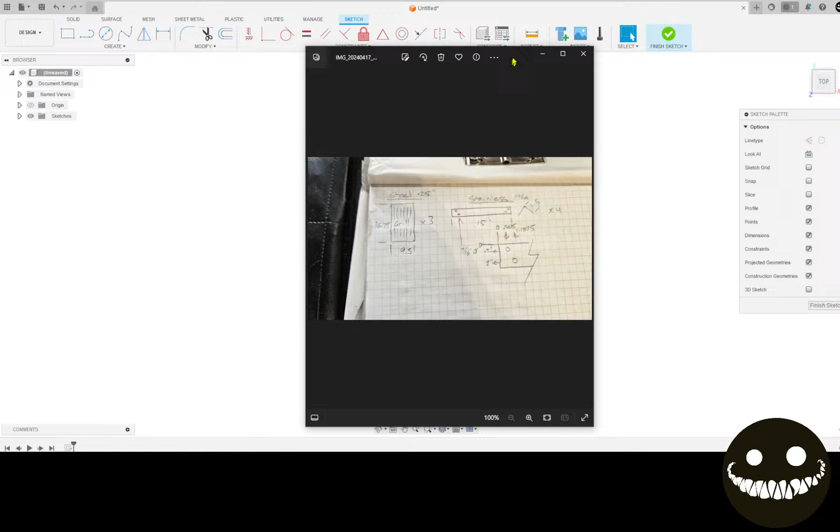Okay, here's some of the notes. It's another picture, and there's another picture. So we are going to rebuild these two components.

We're going to rebuild this piece of angle that has several holes in it, and we're going to make that out of 14 gauge stainless. And this is the barbecue, and we're going to remake these stamped grills out of 1/4-inch plate instead of stamped. We'll do a pretty generic hole pattern to start, just to go through the whole thing, and then maybe come back and try to make some more exotic grill shapes.

And then I have notes here, a little bit of dimensions. These are 9.5 by 16 3/4, and there's 3 of them. And then these are 1.5 inches by 15 inches. And then I have the hole spacing here for that, and it's a x4 on that.

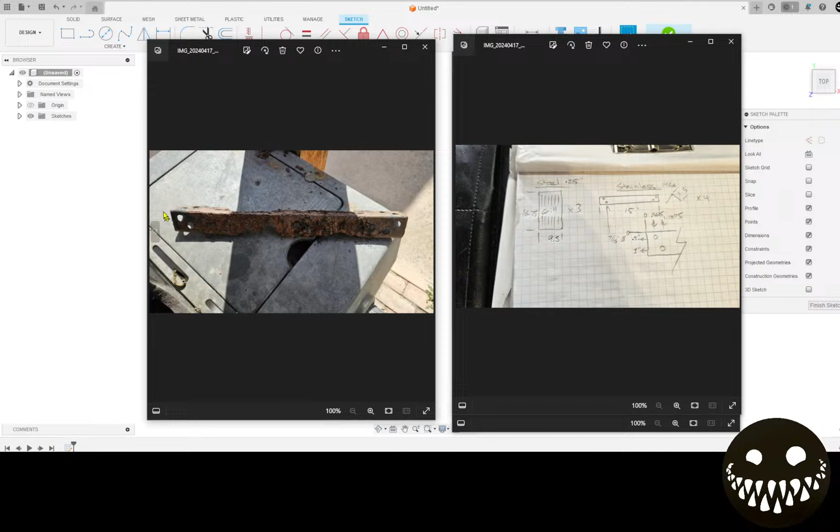All right, so let's start with just these stainless angle pieces. I'm going to move these to the side, and this will go relatively quick, but we'll use the sheet metal function to make these. Alright, move these to the side to my other monitor, and we'll get going.

So I've already started a sketch here. I'm just going to back up on this. I'm going to start a sketch. I'm going to start this sketch in the, doesn't really matter if we're going to start it in the XY plane, just for habit. I'm going to start by making a 2-inch, see, I could do this right on the origin too with the center point rectangle. I'm going to go 1.5 by 15 inch. I'm going to finish this sketch.

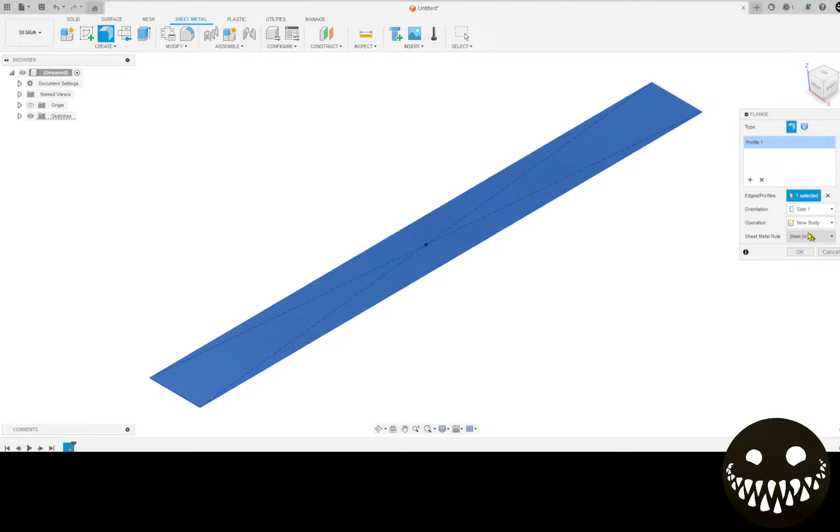And then from here I'm going to move into the sheet metal environment and pick flange, and this is going to be my flange. Alright, and sheet metal rule steel inches, we'll verify what that is after. Okay, the default kind of gives me what I want on that anyways.

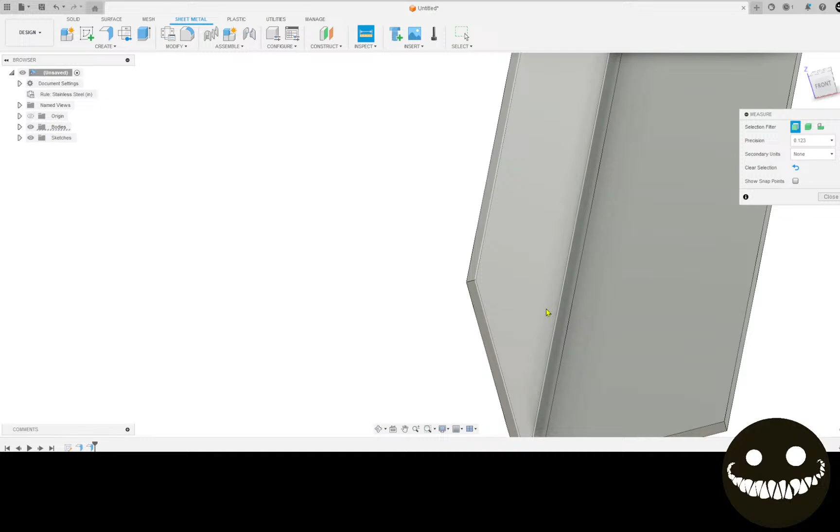I'm going to pull another flange off the edge, 1.5 inches tall. And okay, I'm just going to verify the flange height. And sure enough, it is 1.5 inches. And then we'll verify the flange height the other way, 1.5 inches. Great.

So now let's get into putting these holes in. So I'm going to see if we can start a pattern on this face right here. And I'm going to flip it over. So on the end here, I'm going to do these holes. I have center line dimensions measured off of here, so I will use those. So I'm going to project this line, and I'm going to offset it. I'm going to use the construction line.

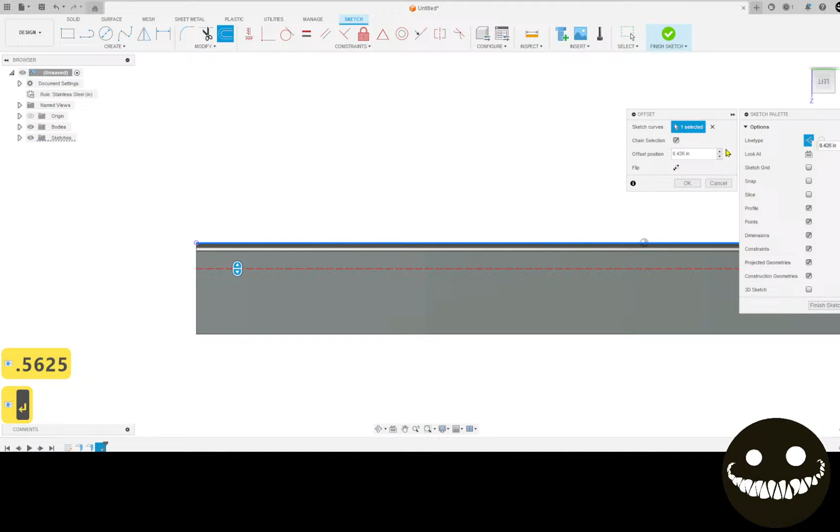Oh yeah, I'm having a hard time reading what that even says on this - my drawing, not my drawing, the drawing I was given. Okay, that's 0.5625. No? Let's do it again here. 0.5625.

Then we'll do another offset command here, and that one will be 1.875. And then again, we'll do the repeat offset command, and it'll be just off this line, and that'll be 0.5, flip. Okay, and one more time. I think that says 1 inch. I'm sure it says 1 inch.

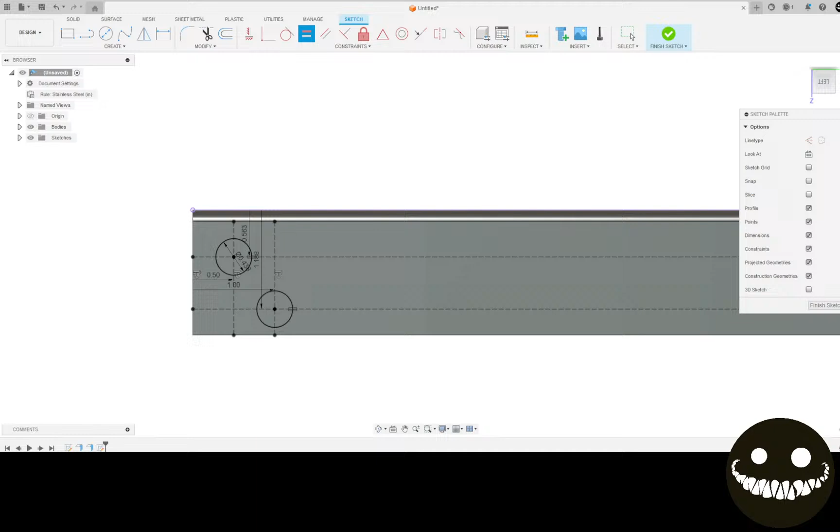Okay, the intersection of these points are our 7/16 holes. Take it off construction line. I'm going to use an equals constraint to make those the same. It sure seems close to the edge. Let me just take a look on the picture. 7/16. I guess it is that big. You take a look at the picture on here. I'll zoom it way in so you can actually see what we're looking at.

I guess it is kind of close to the edge the way those holes are. I will assume that it is drawn correctly.

Okay, and what I'm going to do is extrude those.

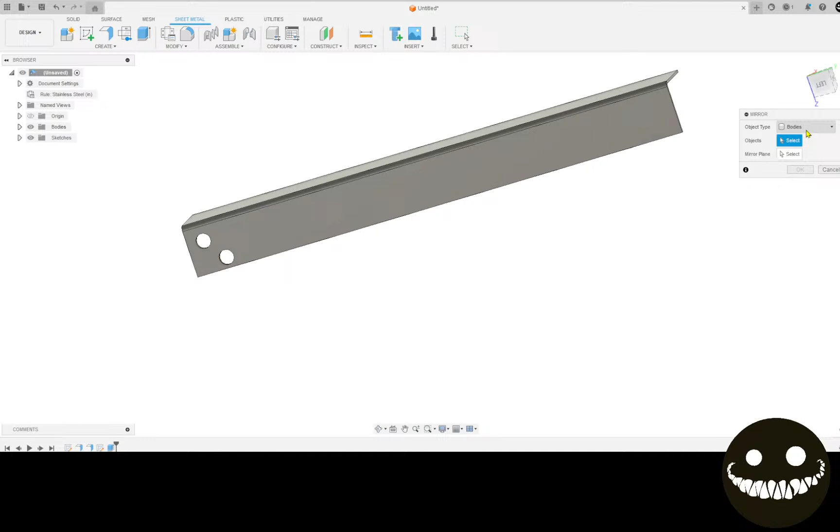And then I'm going to do this. I'm going to go mirror, and instead of bodies, I'm going to go feature. I'm going to mirror that last hole cutting feature. The mirror plane will be this. Okay, now let's cut those holes on that side.

Almost have to like flip and mirror to do it again. I think what I'm going to do is go back to edit sketch, copy, finish sketch, start. Oh nope, I'm going to start a new sketch on this face, paste.

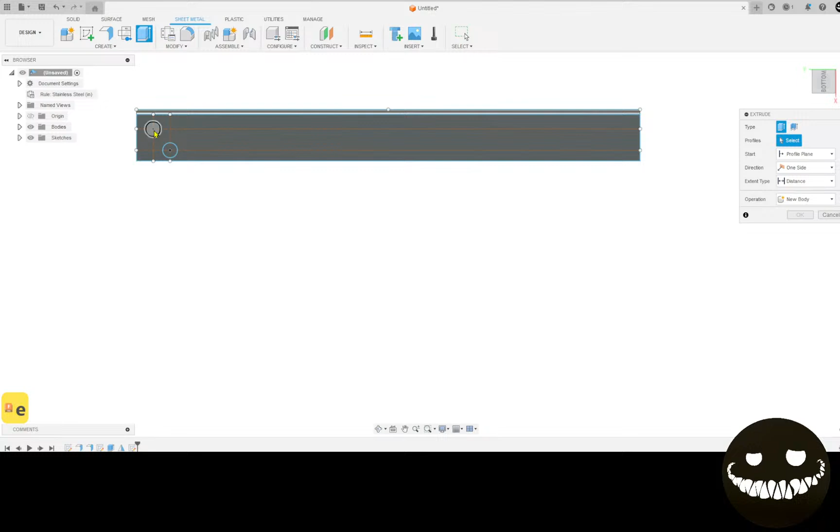Perfect. And then we'll just extrude again. Alright, and we will mirror that feature.

It's the nice thing about centering stuff on the origin is you get this mirroring ability.

Now, just take a look at that picture again, just to see if there's a radius there. I think there might be.

I am going to just ease those corners.

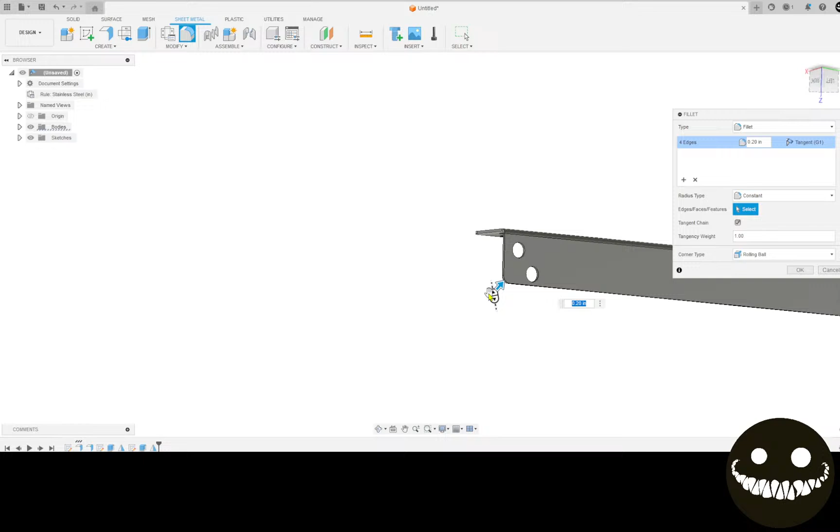Let's make a flat pattern. Alright, now we have this nice flat pattern.

So what I'm going to do next is I am going to save this file, which I should have done right off the bat. And I'm going to call this BBQ replacement angle.

And now I'm going to go derive this flat pattern. Okay, excuse me. Now I've derived this into this other project page or tab, and so I've got one of these components now.

I'm gonna go like this, and let's pattern the components. Get 3 of these, or 4, I mean, because I need 4.

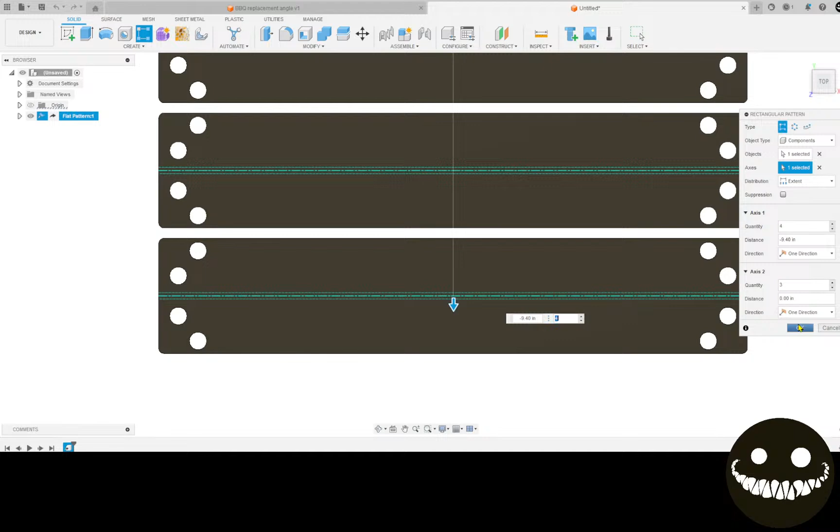Okay, let's move to the next stage, which is manufacturing.

I'm going to create a setup, bottom left hand corner. I have a default of a 1/4 inch of stock around the outside just to give me a little meat when I'm cutting out, when I zero to that corner.

And we're going to call this BBQ replacement times 4, SS angle.

Alright, let's go into cutting. Select our tool. I'm going to do slow speed fine cut 14 gauge, but that's going to be not stainless.

Well, for the sake of it, let's go through making a tool. We're going to go and up here to the plus sign when we're in our library, and we're going to create a new tool. And it's going to be a plasma cutting tool.

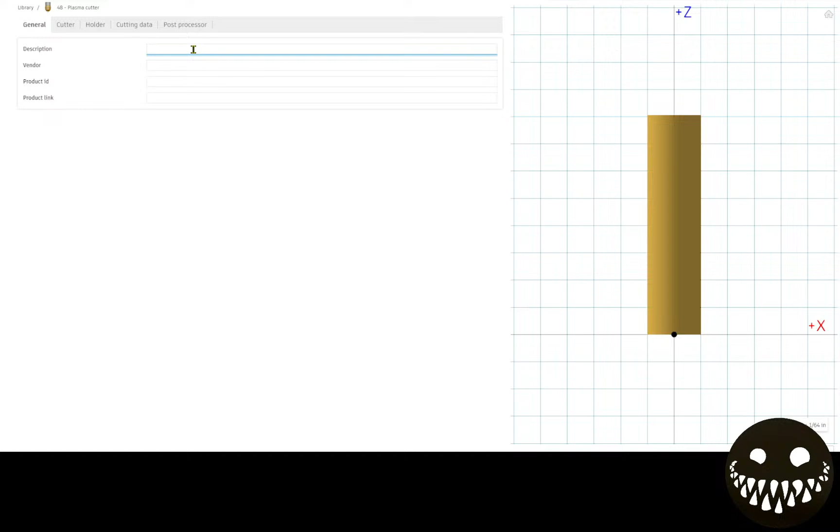And description is going to be stainless, 14 gauge, fine cut low speed.

Vendor, I'll put Hypertherm. Don't really need this information.

Now, I am going to quickly pull up the cut charts for my cutter. I'm using the Powermax 65 or Powermax 85. There we go, Powermax65/85 manual. Let's bring that up.

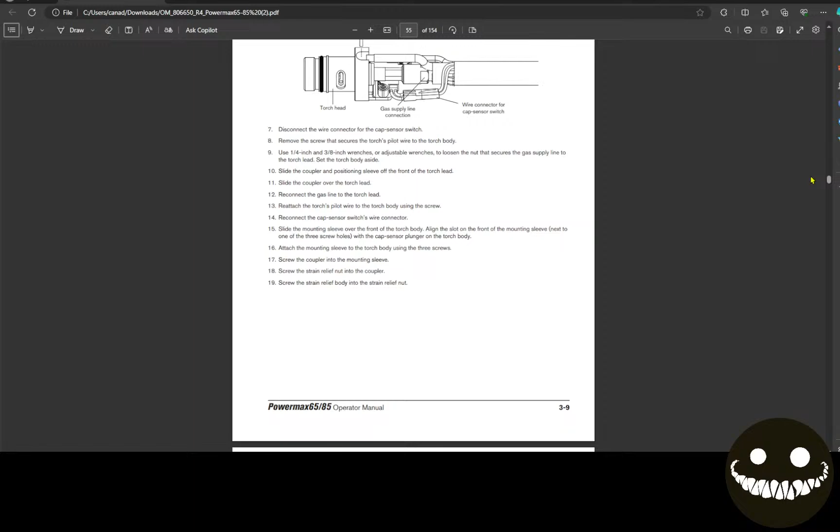Find. I should have just searched it at the beginning. Here we go, using the cut charts.

So fine cut, 45 amp, 351. It's too bad it doesn't actually give a page number, but I can click it.

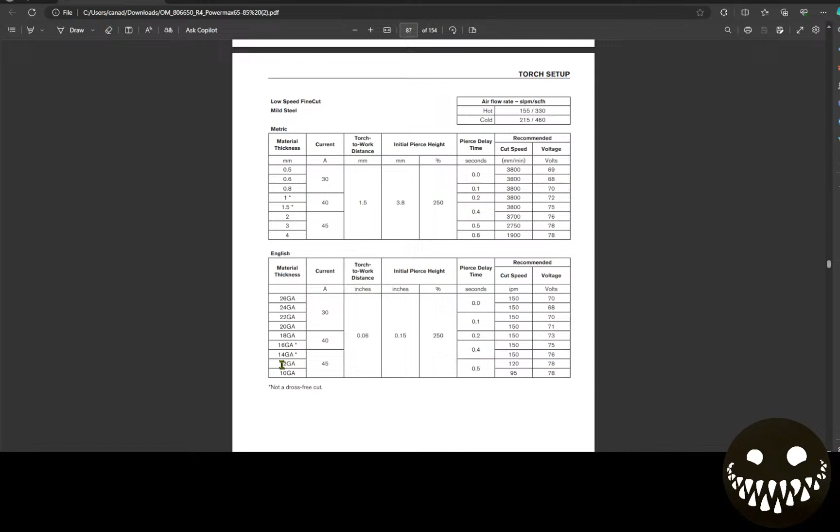14 gauge, and you notice here it says not a dross-free cut with the asterisk. Here, let me zoom right in. See, asterisk, not a dross-free cut, but I always find it has really good dimensional edges.

Oh, and we're going stainless steel. Here it is, which doesn't have the dross-free cut thing on there anymore because it's actually pretty clean. I forgot we were doing stainless there for a second.

So you notice we're at 40 amps here, and 110 inches per minute, and the voltage is 69, and we're gonna have to go up a bit to find the kerf width on another chart, but let's fill in some of this information first.

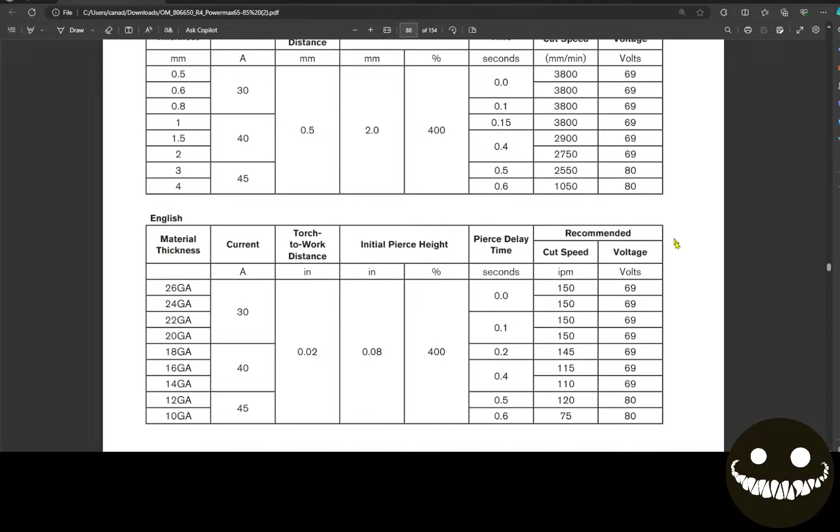Actually, no, let's go find that kerf width first. That's page 88. Kerf width is up before all these charts start. Right here. Right there.

Stainless steel, fine cut, 14 gauge, 0.04. All right.

Gonna go into nozzle diameter. Nozzle diameter is actually talking about this here, but Fusion will cut to this width if you put an inch in, and it wrecks the simulation, so I always use the kerf width for the nozzle diameter.

And then the simulation will look proper. It used to work, and then they made some adjustment. It doesn't work. And I think we said 110 inches.

I'm going to write that in here, and we'll go back and look. Cut height will be 0.0, or no, 0.02. Stainless is a little lower. Let's just recheck.

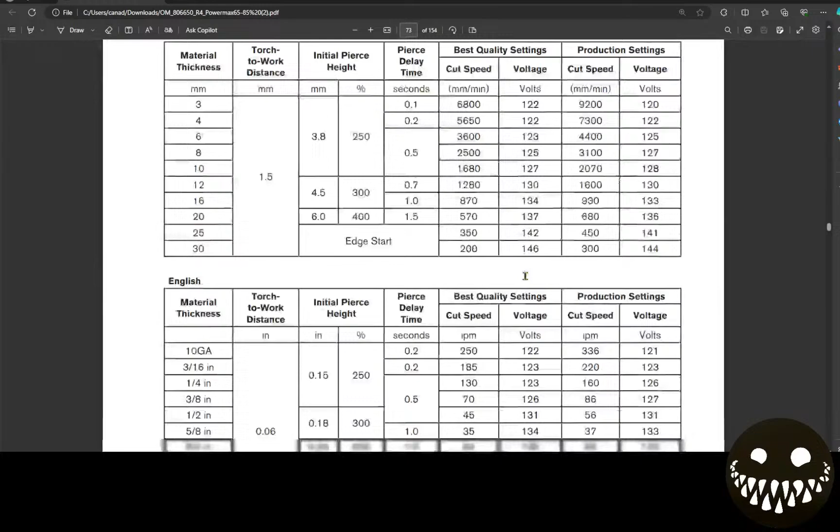So yeah, 0.04 for the kerf width, and then if we go down to page 88.

We find that our torch to work distance is 0.02. It's a third of what the normal cut height is.

And then you see the initial pierce is 0.08, which is about half the normal pierce height. But in this case, it represents a 400% increase from cut height to initial pierce height, whereas in the other charts, it's only a 250% increase from 0.06 to 0.15, excuse me.

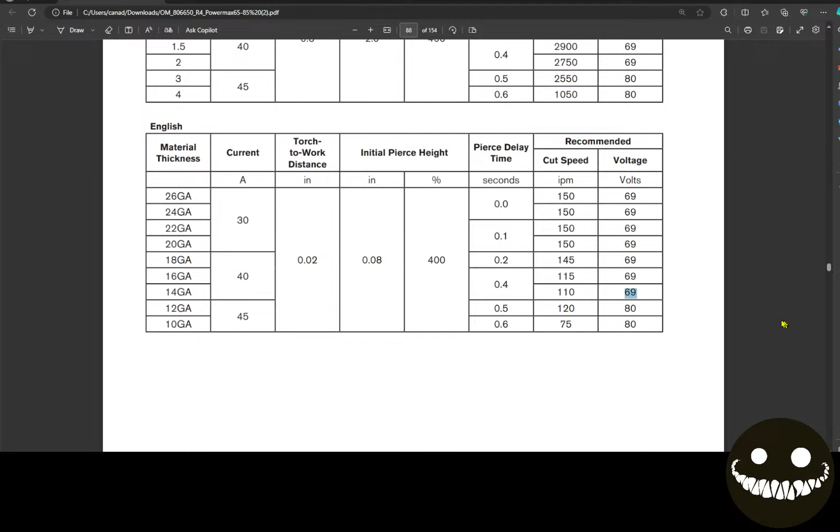Okay, anyhow, yeah, it was 110 here. So let's get that, and we'll just remember this. We could actually put that in there in our notes if we wanted, but 69 for voltage.

All right, that's it, we'll accept that. And we want all these face contours selected.

I don't think I'm going to do any feed rate or anything like that. I could put some notches in though, maybe I should do that. But let's go through here and then we'll go back and make some changes, and I'll show you how some of the parametric connections really are awesome for Fusion 360.

We'll do a lead in. I think I'm going to just make all the lead ins for that 7/16 hole. So 7/16 divided by 4 if I wanted, something like that, for my lead-in radius. No, that's way too small.

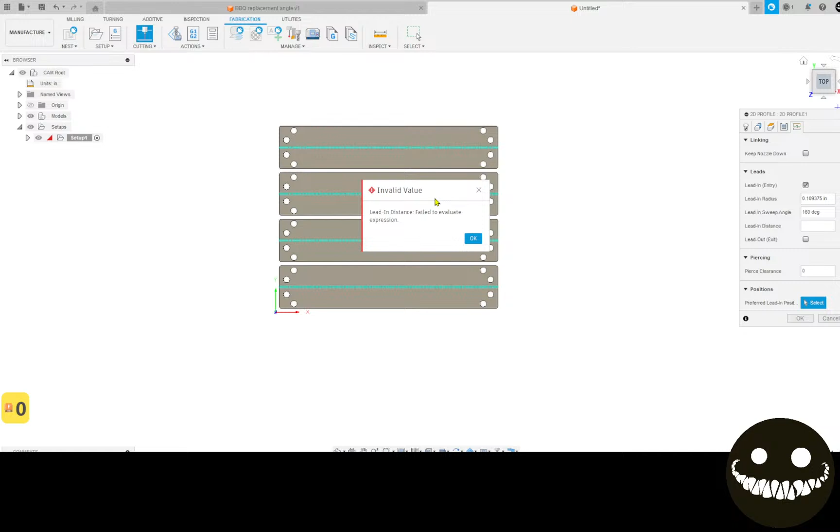You just write a small number in here, like 1/8 inch or something like that. Alright. Oh, I forgot to have a number here in the lead-in distance, 0. Alright.

Okay, I like that so far. Actually, I'm going to have to watch some of these, they're going to cut right off the sheet on the end. So what I'll go do is go back into edit, and I can prefer lead-in positions, and I'll just add a couple of those. And it'll put them all there.

Perfect. So now I look at this and I go, oh, maybe I should have put some bend reliefs in it, even though with my equipment I can bend this no problem in one go. It might be nice to have some centering equipment or some bending lines in here, but I've already done all this work to this point, right?

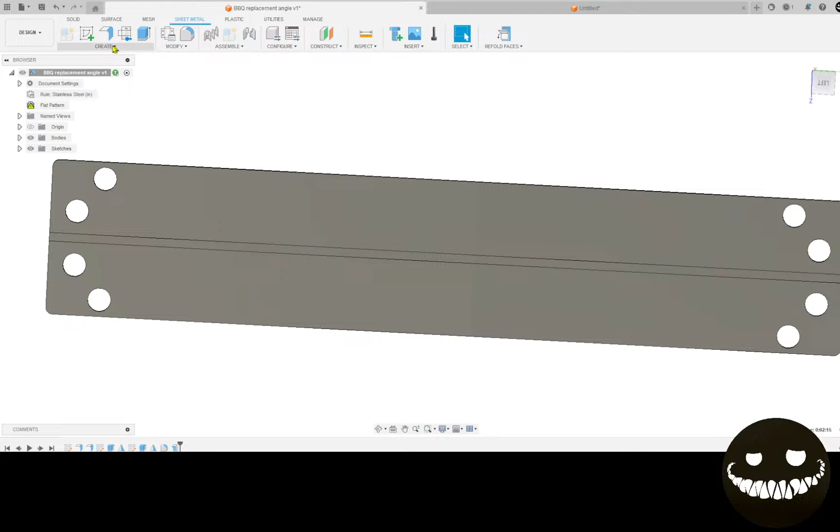But the beauty is I can go back to this angle and we can start working on this again, and I'll unfold this piece. And now I can work on this component. I'm going to do a few cutouts on it.

We have a little notch there. Maybe even a little less. I just want a little notch to let me know where to start. I'm going to finish this sketch.

Now I'm going to extrude this little piece I just created. Alright. Nice little notch. Let me line things up.

I don't think I'm going to round those. But what I want is the notch on both sides. So again, I will mirror that, and I'm going to mirror the feature. It'll be that last extrude, and my mirror plane, I will use the center line again. Alright, and let's refold those faces.

Nice, we have a nice little notch to show us where we're at. Now I'm going to save this.

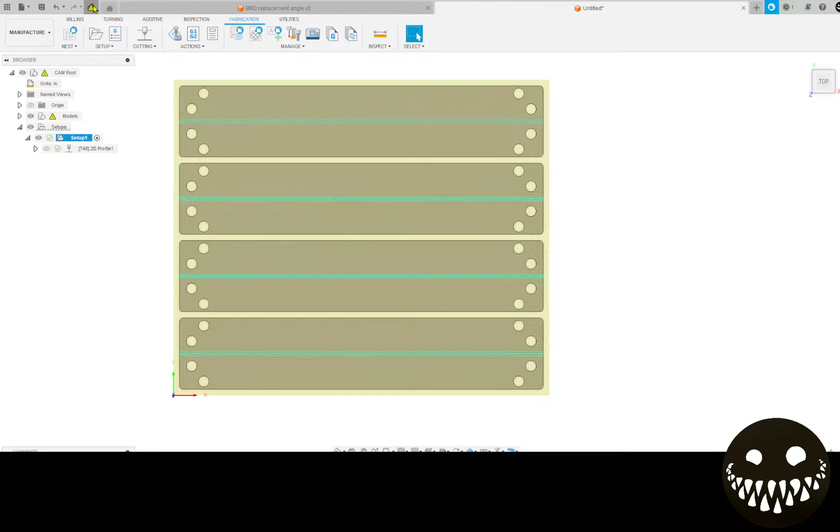Yep, update selected. And now you see we have little notches on every single one. Close, I can just regenerate this file quickly. And it's already updated it with all those notches. So it makes it really quick and easy.

I'm going to just export this. This is ready to cut. It already has the name right here. I can put a comment in here too, and I'm going to put in voltage 69, fine cut low speed.

And this will show up, I'll be able to see that in FireControl. And we'll adjust the pierce height to 0.08. Pierce delay to 0.1. I have an XR, it has less latency than the Pro. Cut height 0.02. Spring back, I'm going to get rid of it entirely. There we go. Let's post that.

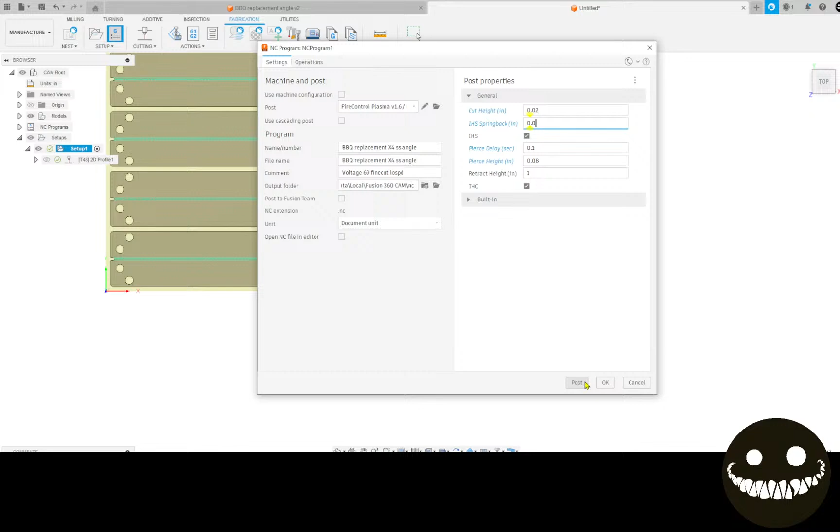So that code's done. We're going to save this file as BBQ replacement angle derived times 4, times 4. Save.

Okay, we're done those components now. Let's move on to the next ones. So our next ones we're going to work on is the actual grill. And here's the actual grill, these 3 components we're going to make. So let's start those. I'm going to start a sketch on the XY plane.

Let's take a look at our measurements here. For the grill, 1/4 inch steel, 16.75 long, 9.5 wide, and we're making 3 of these.

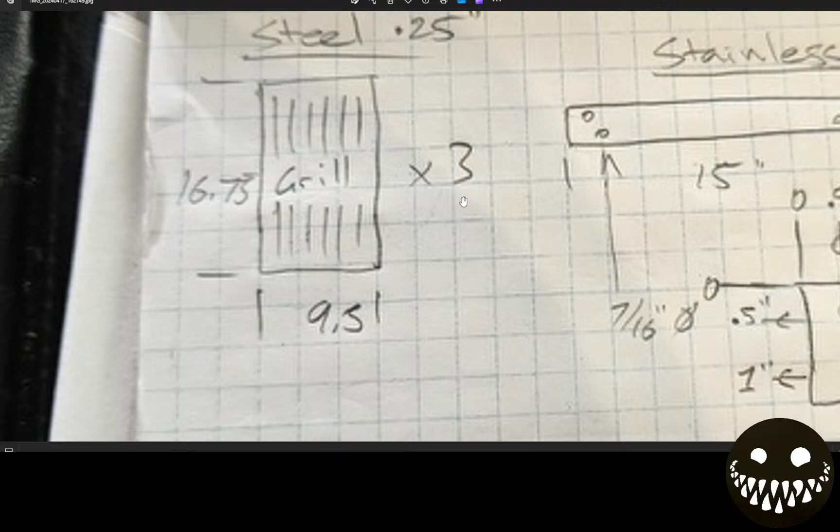These original grill pieces basically had slots separated by a few rails on the end. Interesting - they basically stamped it like you would just lay out some pieces of bar and weld it, 3 pieces one way and a bunch of ribs the other. We're gonna start making something close to this and then maybe do something a little more exotic after.

Okay, we'll start with the rectangle. We're going to use the center rectangle from our sketch palette, centered on the origin plane. It's right here - I can only see this part of origin, but if you make it visible you'll see the whole part. Let's go in there and make it 9.5 by 16.75.

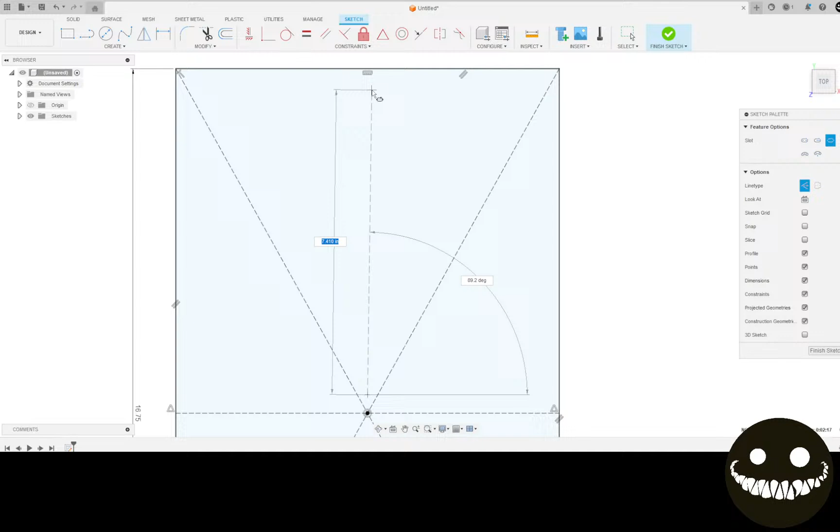Now how am I going to do these slots? Just going to do something basic to start with - a slot. I'm not going to do anything complicated for this one, just a really basic slot pattern, and then we'll go wild in a minute or two.

What do we want, about 1/2 inch width? Is that too wide? No, that's probably about right. I don't have the slots to measure, so. And now let's pattern this.

Let's get a few more ribs in there. I want a little bit more. Let's call that good right there.

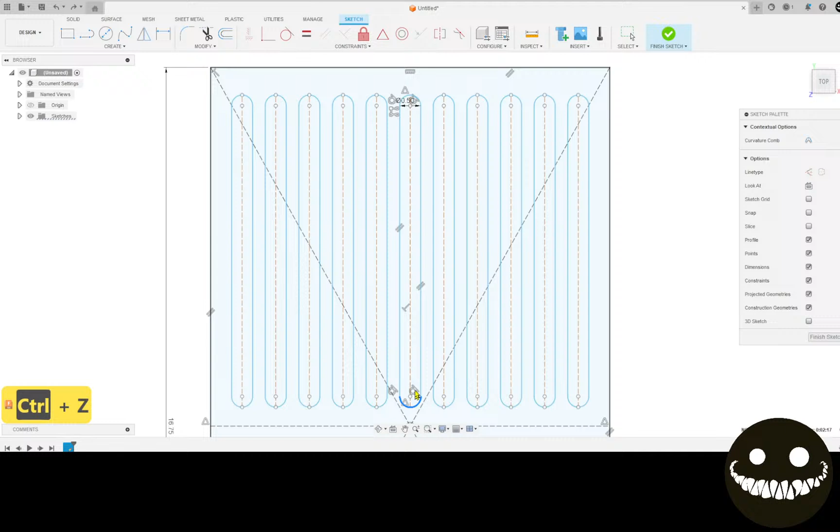I'm gonna go a little less wide. Let's see if I can go 7/16. Will they all change? They should - yes, they do. Good. What else I'm gonna do is grab all these and mirror them.

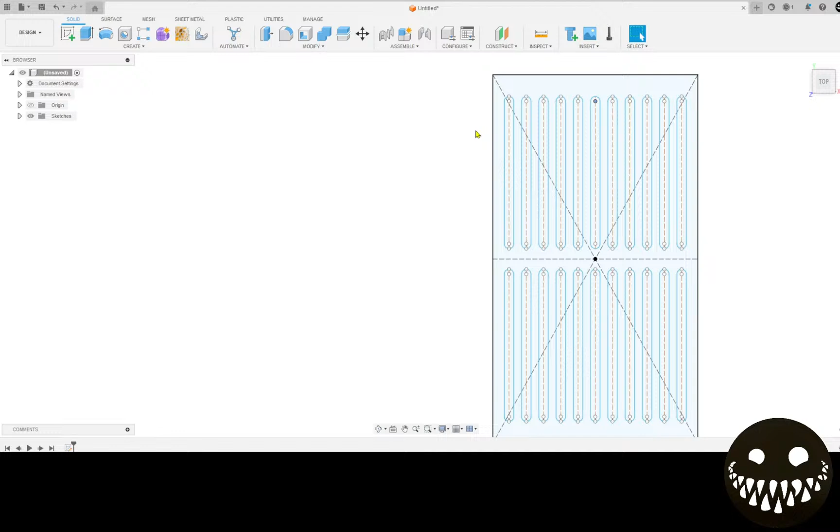Sorry, I'm just thinking about how I want to pattern this. It doesn't matter - let's just move this. I just didn't want too many objects. This isn't the way to do this, but it's the way I'm going to do it right now.

Oh, it won't let me create copies, eh? It should let me create copy. Interesting. Probably a feature in there it doesn't want me to copy, like the patterning or something. You know what? Let's try.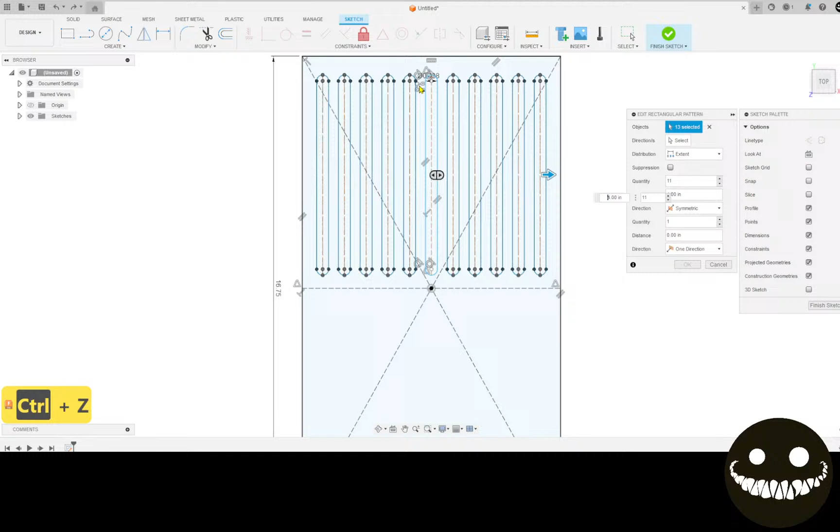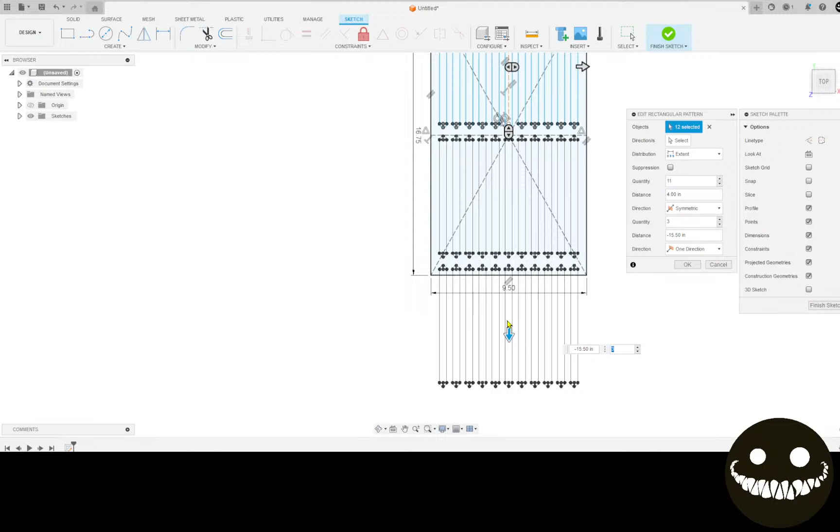Let's try this - in two directions? That's too bad. There, that's what we want. Perfect. Kind of perfect.

Let's go back one. That's kind of what I want. Let's hit OK, and then I'm going to move this so we get a little bit more gap here. I didn't want to take it off center line there by accident - I should have way more constraints.

Sure, that's fine. And let's mirror some of this stuff. Okay, and extrude - 0.25. There we go, it's kind of cool.

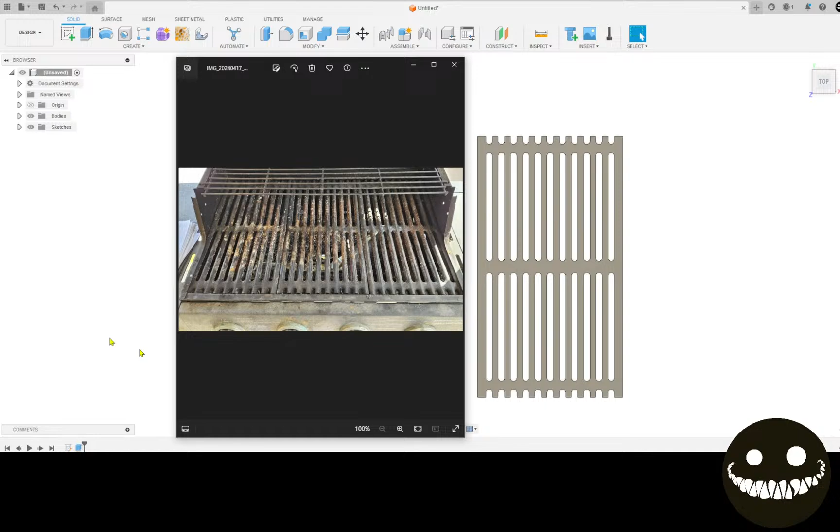Alright, let's go back in and see if we can't adjust that. I patterned that way, but I also patterned the other way. I wonder if I could... there we go, 9.

Okay, it'll take a minute to adjust. Getting the black bar of doom over here. It'll work its way through - I've just got a lot of stuff running right now.

Alright, and that even looks pretty decent, actually. I'm going to take a look at that image one more time. Yeah, I could probably do them a little wider - let's go a full inch or half inch. And again, it's probably going to grind for a second.

I've always had a memory problem on this computer. Come on. Bear with it for a second. Come on. I hope we don't crash here.

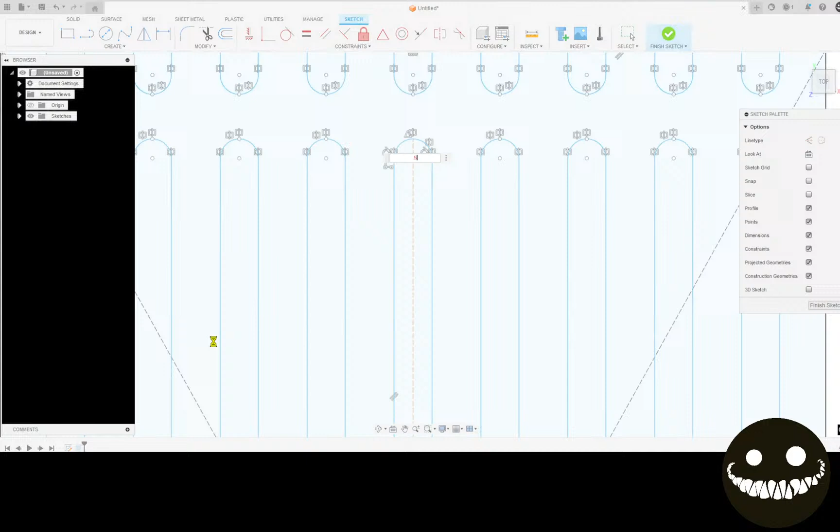That's disappointing, so we're going to show you what a crash recovery looks like. We're going to just recover quick off that, because that's how we make that work.

Oh, perfect - so it didn't recover that file for us, so this gives us a really good opportunity to start again. So let's start again and go from there. That piece was 16 3/4 by 9.5.

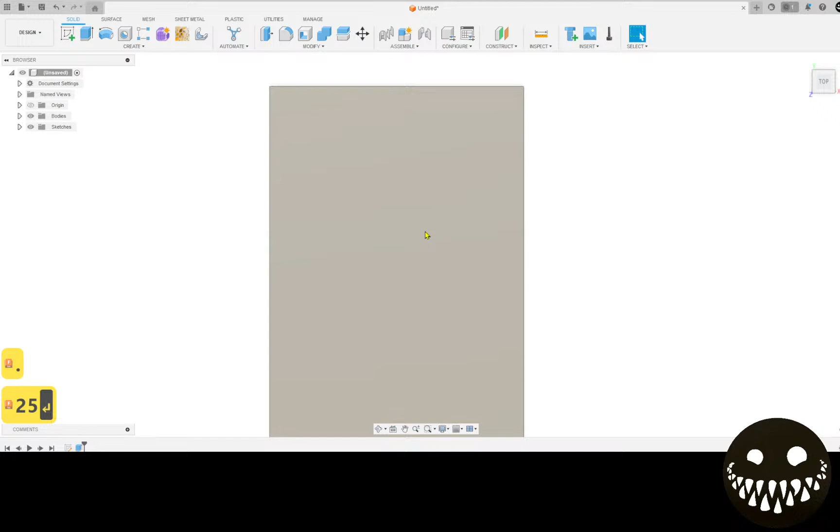Awesome, we'll get some slots now. Okay, and you know what I'm going to do this time? I'm just going to extrude everything 1/4 inch, and we're going to do the same thing as we did last time, but with bodies and cuts instead of the sketch.

So now I'm going to do extrude again. I'm going to bring up that sketch and extrude this, and it's going to just be all the way through. Alright, and now I'm going to pattern - but instead of patterning the body, I'm going to pattern this feature, which is that extrusion I did.

I'm going to do 9 of these, spaced out roughly similar to the... yeah, that's not bad. Here, I'm just going to take a quick look at the reference drawing again.

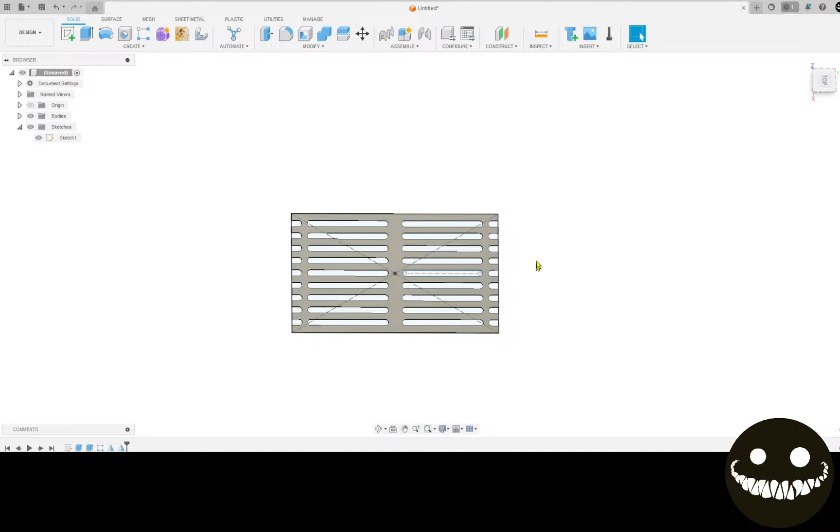Well, that's alright, very similar to the reference drawing now. Could probably bring some of this a little closer together. And I can do that even from here, right? I can grab the sketch and drag that a bit, and it should respond.

Oh, looks alright. So let's go now and we're going to turn this body into a component, and then we are going to pattern this component.

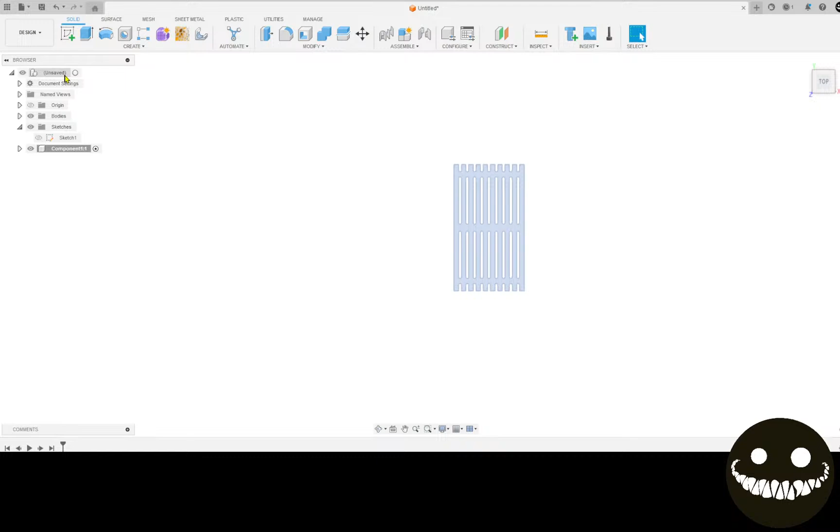I don't know what's going on, but I hate what's happening here. Get rid of the sketch so I can see what's happening. Anyways, let's just pattern this.

Okay, go into manufacturing. I'm going to create a setup, bottom left corner. We're going to call this the BBQ replacement grill times 3. Nope, and we'll just do that again. I think I'm a little tired. BBQ replacement grill times 3.

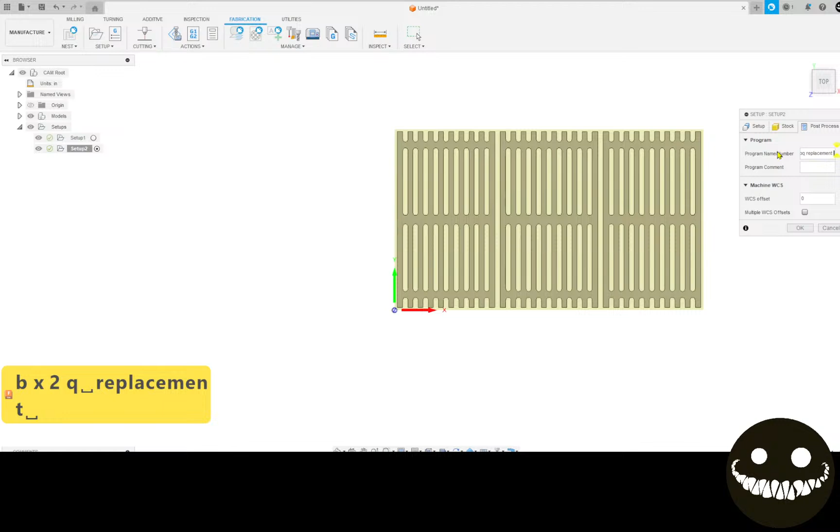Go into cutting here, see what we have for tools for that. A 1/4 inch there, 1/4 inch aluminum, 1/4 inch aluminum. Probably cut more 1/4 inch aluminum than I do 1/4 inch steel. Yeah, one decent tool on here. Unshielded 1/4 inch? No, thank you. 1/4 inch, 45 amps right there.

But we're gonna edit it, just because this tool was made before one of the Fusion updates, so that's why you get that error. So I'm just going to make some adjustments so at least the error doesn't show up.

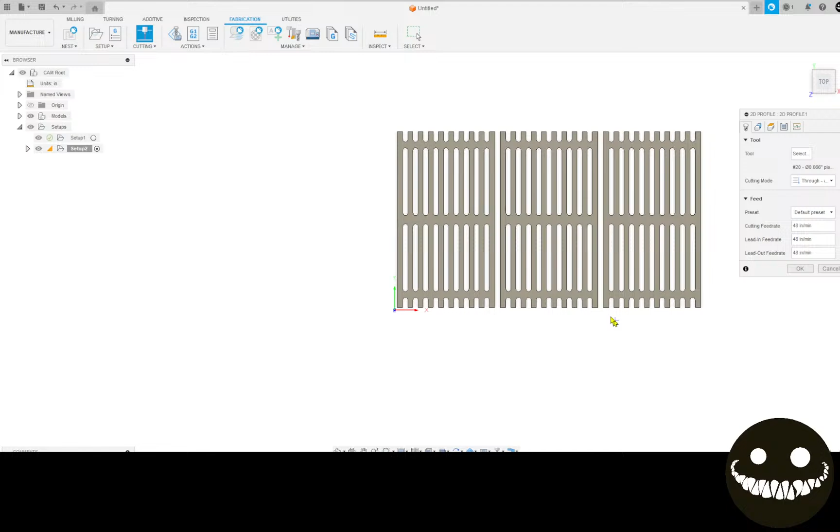Alright, accept. Select all these contours, I'm going to do some smoothing down here. I'm going to do some feed up. We'll do a pretty small lead-in radius, let's do an 1/8, do 160 degrees. Zero, no lead out, no pierce clearance. I'm going to do a finishing overlap of 1/32.

Alright, let's see what that looks like. Alright, let's look at a simulation. So 19 pierces per...

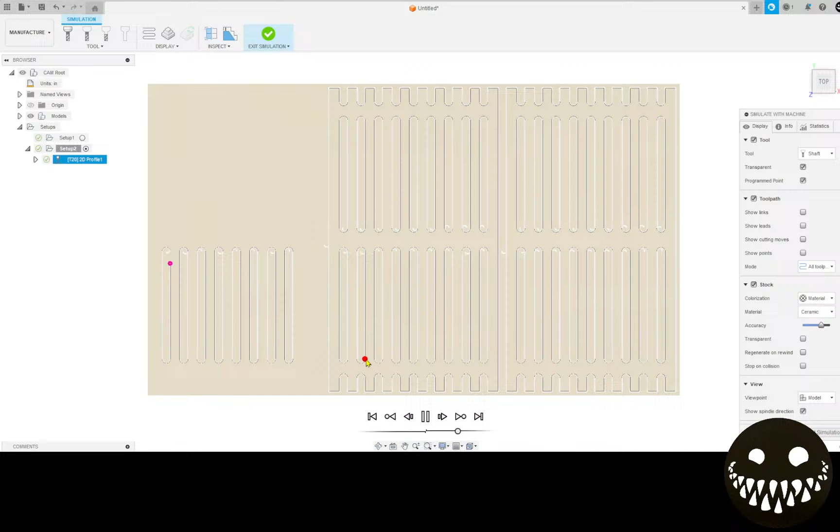So these will be our grills. I think I'm going to take a quick intermission, and then I'm going to do some more kind of less conventional style grills. But I'll finish the G code for this. Okay, exit simulation.

And now I'm going to take this setup and, oops, not that one, the G code. Barbecue replacement, and the cut height is back up to normal here. Pierce delay, I'm going to put in a full second and back up to a normal cut height. Perfect, post. So all those are ready to cut. But we'll come back and just make some more odd grills in a second. I'm going to save this too.

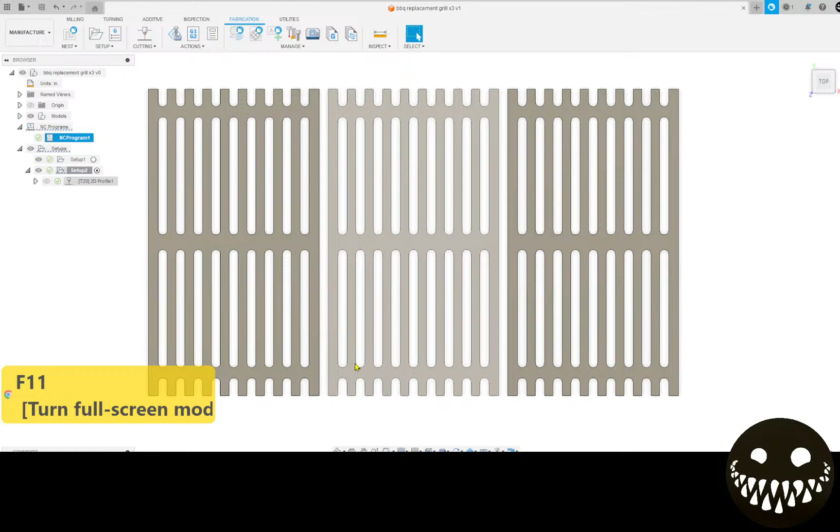Get back to it. Let's go back to design here. Start here, I'm gonna put another sketch in. And what kind of pattern are we going to want?

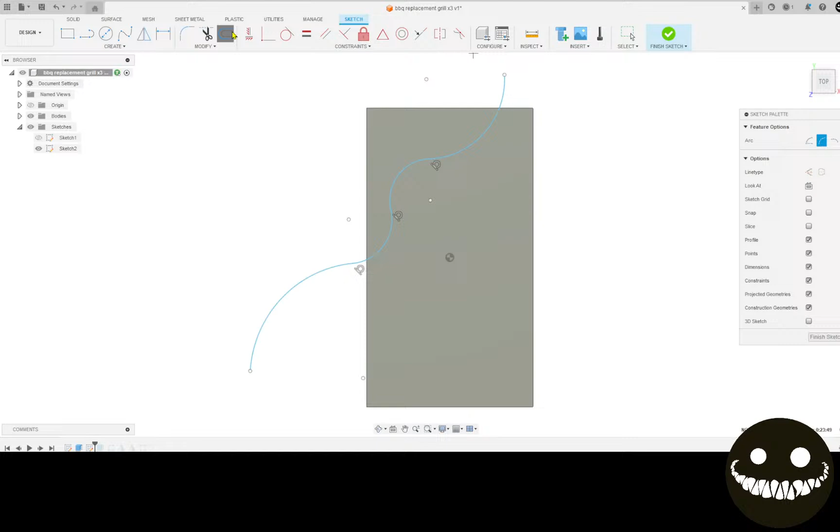You know what? I got a few ideas. Let's delete this one, and delete them all. Okay. Before this one here, I'm going to pattern these.

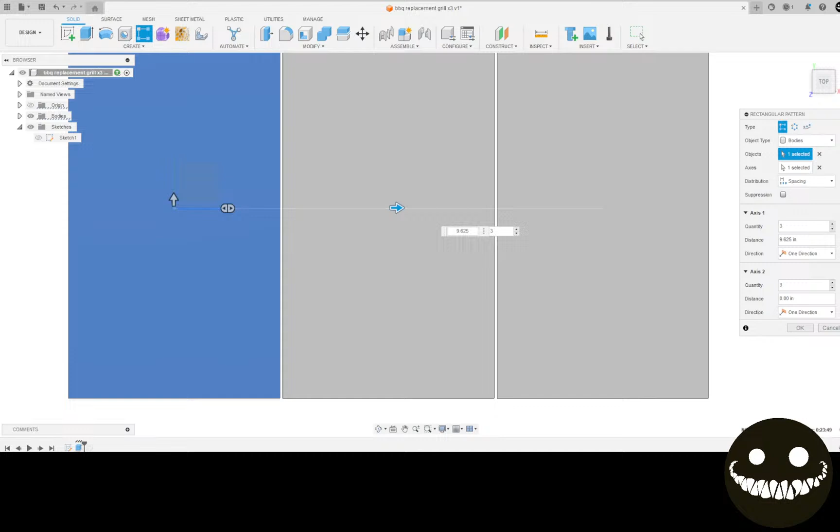Let's just take another look. Pretty tight gap. Probably this one right here.

So now what I'm thinking is doing just a wave through it all, stretch across multiple.

I'm just thinking for a sec how I want to do this. I'll do a 1 inch. Alright, sorry, I got some candy. I'm just gonna leave on the music for a minute. Eat this candy.